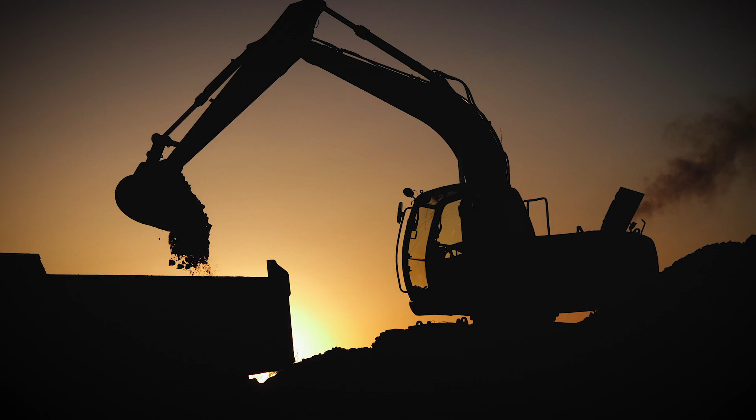In 2023, building and construction made up 37% of global greenhouse gas emissions. Demand for sustainable and affordable homes is on the rise. Through off-site building methods, powered by automation and software, MiTek is positioned to help reduce these emissions with our partners, like Thrive Home Builders, a leader in innovation and environmental stewardship.

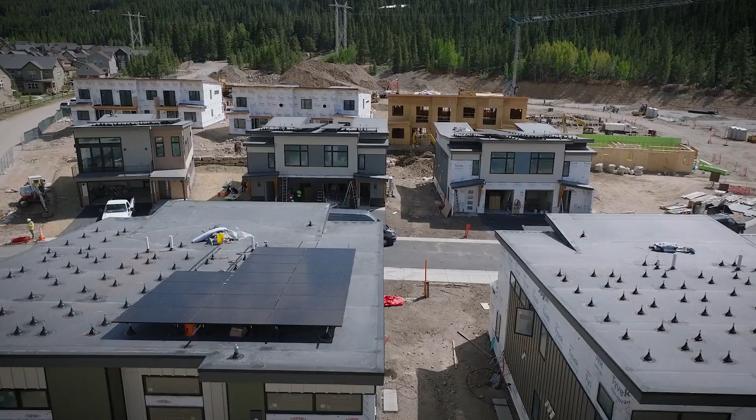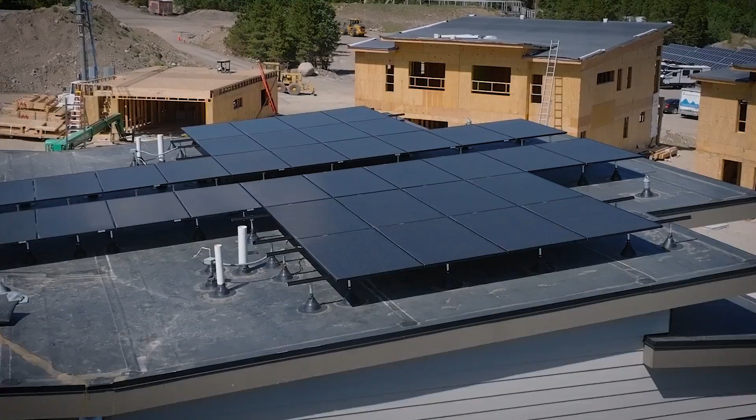Homes can do more for the people that live in them. They can make them safer, healthier, and help them reduce costs over the course of the ownership of the home. Since its founding, Thrive has committed to sustainability and energy efficiency, which sets it apart in the Colorado market dominated by national builders. Our partnership with the EPA Indoor Air Plus program really focuses on safety, making sure that harmful

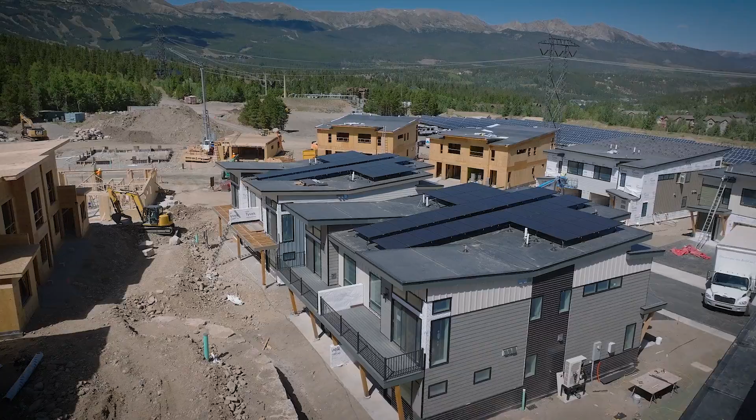chemicals are not introduced into the house, that there's no off-gassing. It also helps to make sure that there's good ventilation and strong filtration in the home, creating an atmosphere of really healthy indoor air quality.

When you're building a zero-energy home or even a near-zero-energy home, you're reducing those operating costs by reducing how much those customers pay each month for their utilities, hopefully allowing them to purchase more home because their operating costs are offset from the mortgage.

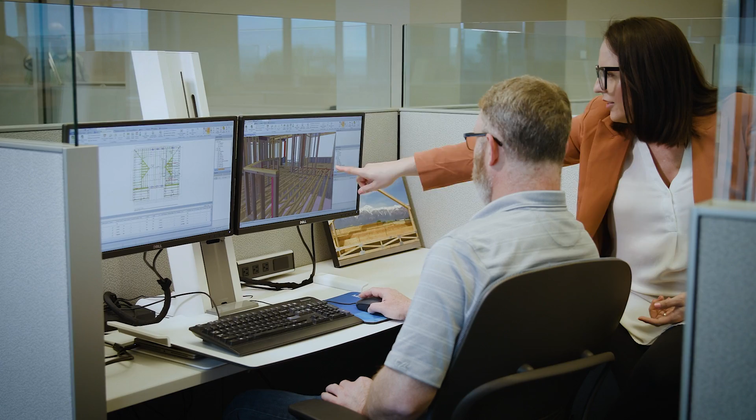After partnering with MiTek, Thrive was able to benefit from MiTek resources, including its industry-leading solutions and vast network of global partners. That partnership really started out of a shared mission to figure out how to calculate carbon in the construction industry. What we're doing for both operational and embodied carbon is also important to MiTek. And so we've partnered up and looked at a number of things around the country and around the world on how other industries and how other home building operations are calculating carbon and reducing their carbon.

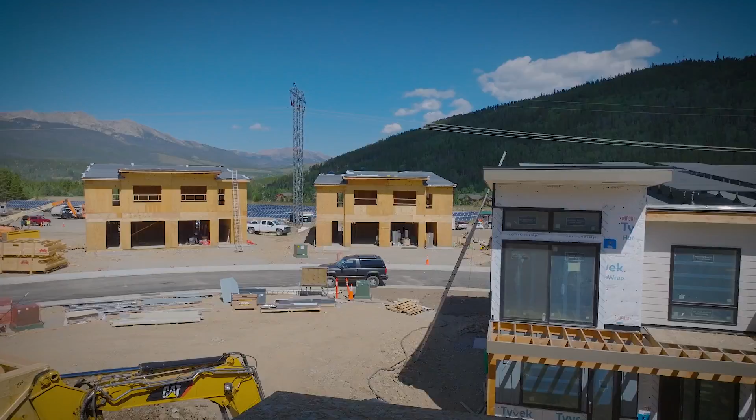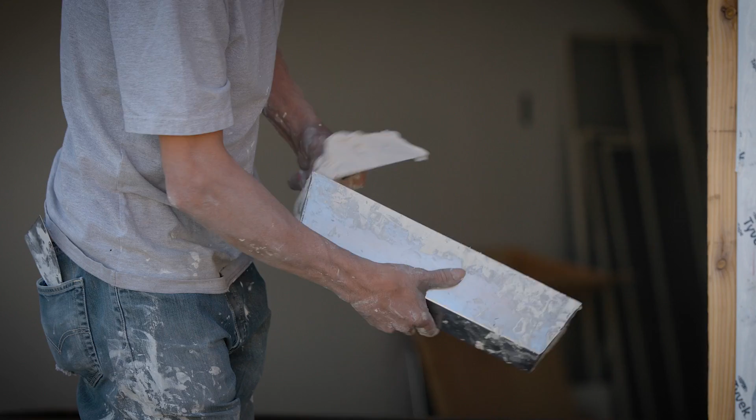Thrive designs its buildings with components using MiTek software. Studies show that when structures are built more precisely and efficiently, energy consumption, required materials, construction waste, and construction emissions can be cut in half, and up to 33 times less job site waste is produced.

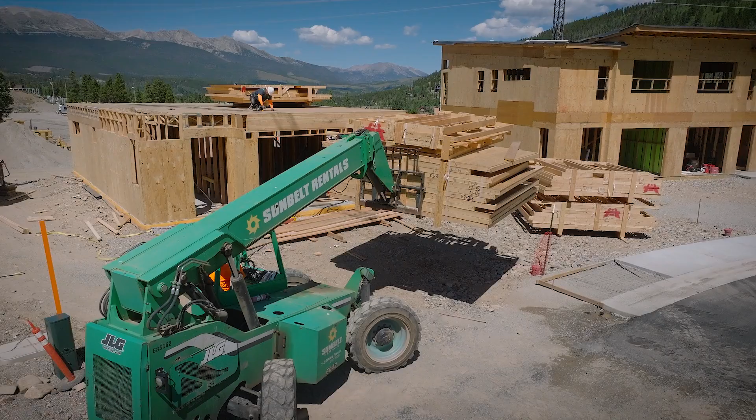By building with components, you get to maximize the use of your lumber through the computer software that they use to design and engineer those components. And that's a huge step in reducing your carbon footprint as well, because you're using less material along the way. You have less waste on the job. You have less fuel for hauling off that waste on the job. It also provides consistency. It provides accuracy, and it provides speed in construction to help us build faster.

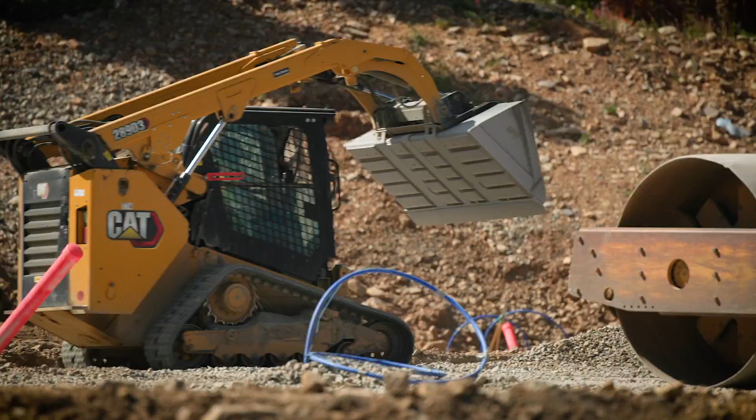To achieve carbon neutral housing, Thrive had to calculate operational carbon, which is the carbon the home produces in its daily operation, and embodied carbon, which accounts for every element that goes into the home and how much carbon it produces and emits during its production and transportation to the job site.

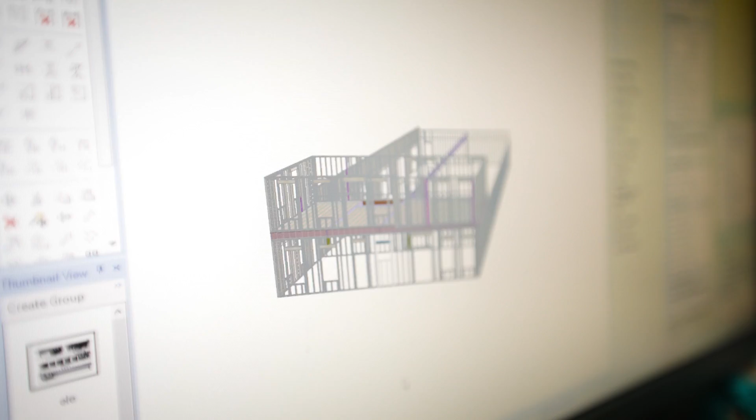One of the toughest things for a builder like us is just knowing every piece and part that goes into the home. There's a tremendous amount of different SKU numbers that go into the home and a tremendous amount of each that go into the home. Thrive needed to calculate all the data from the bill of materials to determine the total amount of embodied carbon for the home. But without the internal resource to create the bill of material, they partnered with MiTek Services to complete that work.

We're a small team that accomplishes a lot, but we don't have that skill set. And to have a partner like MiTek that has not only the skill set, but the software that can come in and really help us dial in that bill of materials and figure out exactly what goes into the home has been a huge step forward in our process to being able to calculate, especially embodied carbon.

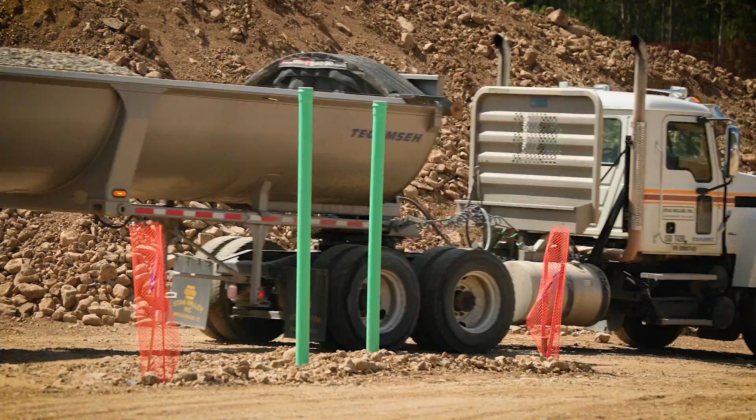Looking ahead, Thrive Home Builders is dedicated to extending its sustainability mission and further advancing carbon-neutral building practices for future generations. What motivates me to get up in the morning and show up to do something as challenging as home building is really how we do it. To really not only just build the box and put it out there, but to build the best home we can and provide the customers with something more.

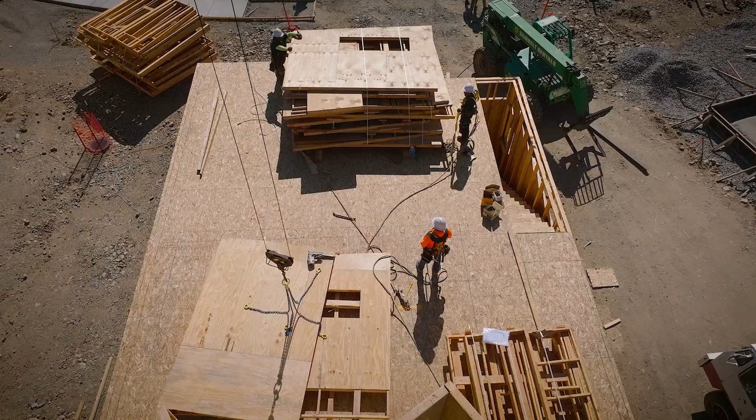Help them understand that the home can do more for them, and produce a home that saves them money, that makes them healthier, that helps them live the fullest life. And when we can use the full breadth of the MiTek software to incorporate roof trusses, floor trusses, wall panels, and even HVAC into that plan, it helps us as a builder plan better, eliminate mistakes, eliminate conflicts, and come out of the ground faster and with fewer errors when you start a new community.